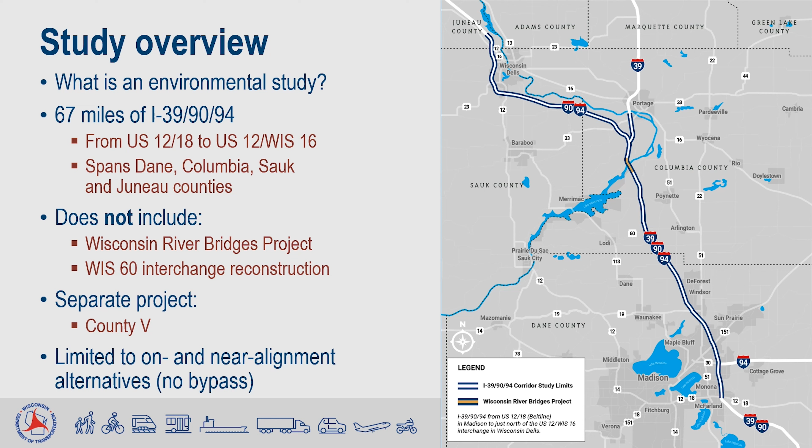Also, County V, which has been discussed previously at PIMs for this study, will now be studied and constructed as part of a separate project. This study is limited to on and near existing alignment alternatives, which I'll cover later in the presentation. I want to emphasize that bypass alternatives that had been considered with a previous study are no longer being considered.

Here you can see the study's purpose is to address existing and future traffic demands, safety issues, aging and outdated corridor infrastructure, and corridor resiliency.

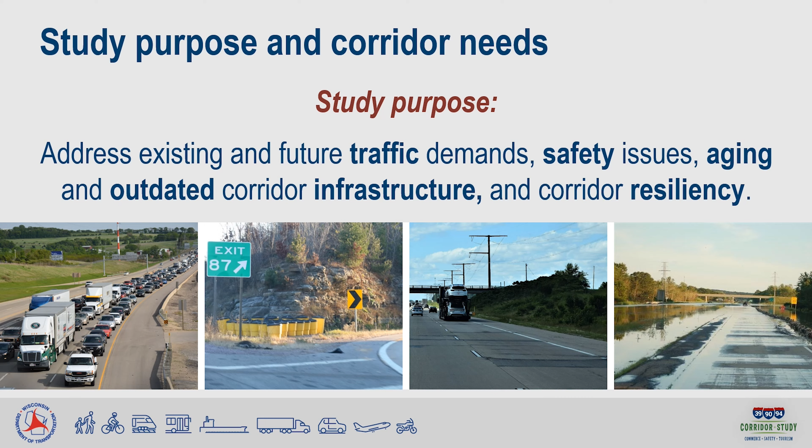The corridor needs include traffic. Traffic volumes along the corridor, especially truck traffic, are increasing. That causes vehicle congestion and backups along the interstate at times of heavy traffic, like rush hour and Friday and Sunday afternoons in the summer. Because this is an interstate corridor, much of the evaluation relates to automotive traffic. However, WisDOT is also looking at bicycle, pedestrian, and transit traffic at intersections and other crossroads.

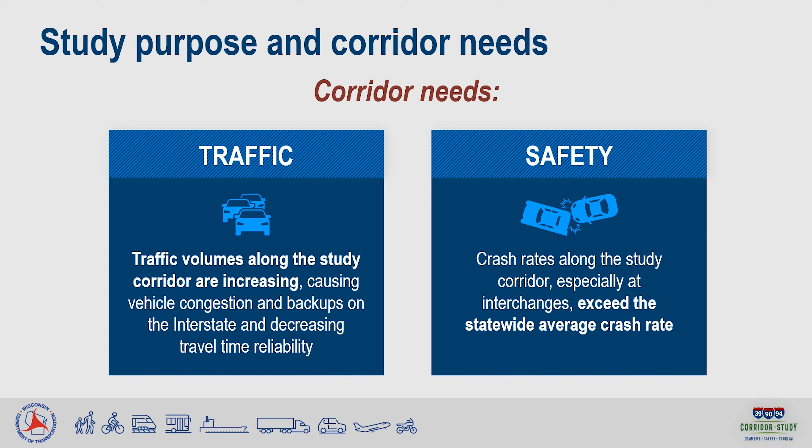Safety. Crash rates along the study corridor, especially at interchanges, exceed the statewide average crash rates. Congestion and outdated roadway designs contribute to crashes.

Pavement. Pavement along the corridor is in need of rehabilitation, maintenance, or replacement. If this study doesn't move forward as a project, it's anticipated that rehabilitation maintenance projects will be needed in 26 of the next 30 years somewhere along the study corridor. Each of those projects would require lane closures and cause traffic impacts.

Bridges. Many of the bridges along the corridor also need work. By the year 2030, 84 of the 113, or around 75%, of the structures within the study corridor will be over 50 years old, and many do not meet current design standards.

Flooding. Flooding is also a concern in areas of the corridor, as both I-39 and I-90-94 are in low areas as they cross the Baraboo and Wisconsin rivers. WisDOT also reviews environmental impacts, agency and public input, and costs when evaluating how to meet the corridor needs.

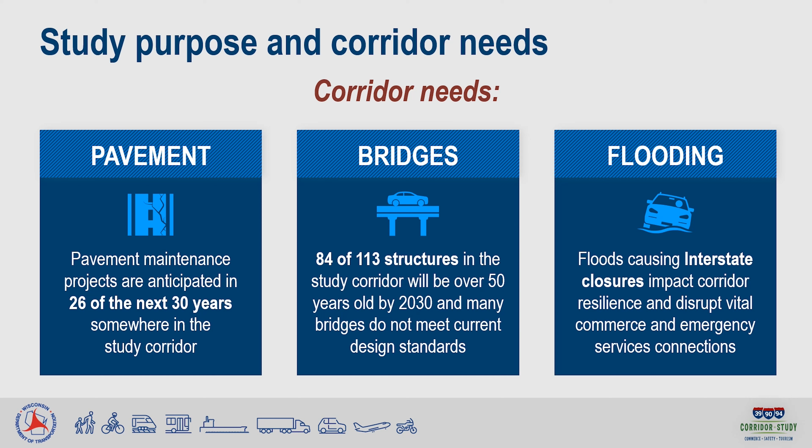Most of the remainder of this presentation will take you through the alternatives that are being carried forward for further study in the draft environmental impact statement. WisDOT is carrying alternatives forward based on how well they meet purpose and need factors, their impact to the environment, public feedback received, and cost. All alternatives considered are available to view online on the I-39-90-94 study website.

Here are the items that we would like your feedback on today. For those attending an in-person PIM, there are surveys available for you to fill out to state your preference related to intersection control, like stop signs, roundabouts, or traffic signals, and alternatives throughout the corridor. Everyone has the ability to fill out the survey online using the QR code shown here.

I'll start with the remaining alternatives on the mainline and then move to each interchange along the corridor. We have two remaining mainline alternatives. Both are what we call modernization alternatives. So what is modernization? Modernization is basically a term we use when we plan to upgrade infrastructure to meet current or modern standards whenever possible.

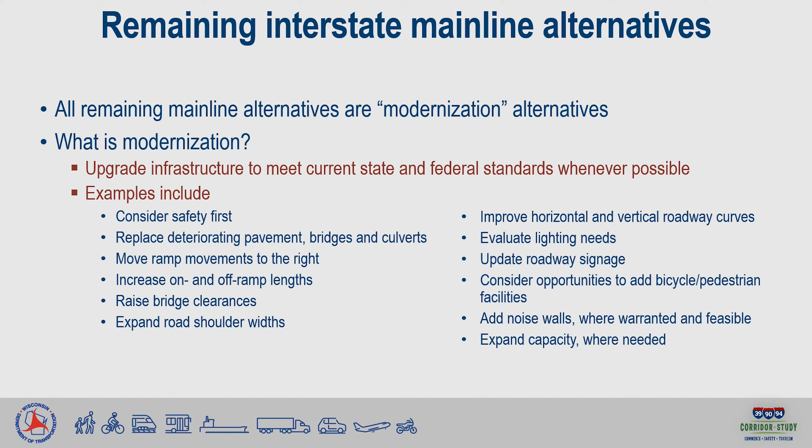Here you can see the cross-section of the two modernization alternatives moving forward for further study, and how they compare to the existing roadway footprint. These cross-sections represent what the roadway looks like in most areas.

There are some areas, particularly between the I-94 Wisconsin 30 interchange and the US 151 interchange, where both alternatives are wider than this. Both alternatives have 12-foot lanes and typically have 12-foot shoulders. The one exception is in the modernization hybrid alternative, where we have 18-foot shoulders that could be used as a managed lane.

A managed lane uses the inside shoulder to travel during peak hours or when needed. It is a dynamic operation that is monitored and only turned on when needed. This is shown above in the blue highlighted area.

The overall width of the modernization plus added general purpose lanes alternative is 12 feet wider than the modernization with managed lanes alternative. This added width is because the modernization hybrid uses the shoulder when additional capacity is needed, while the modernization plus added general purpose lanes adds a lane at all times, so no cars need to drive next to the barrier wall.

It should be noted that managed lanes are not always open when needed. It is anticipated that 25% of the days when the managed lanes are open, they could be partially or fully closed due to incidents, large snow events, power outages, or other reasons.

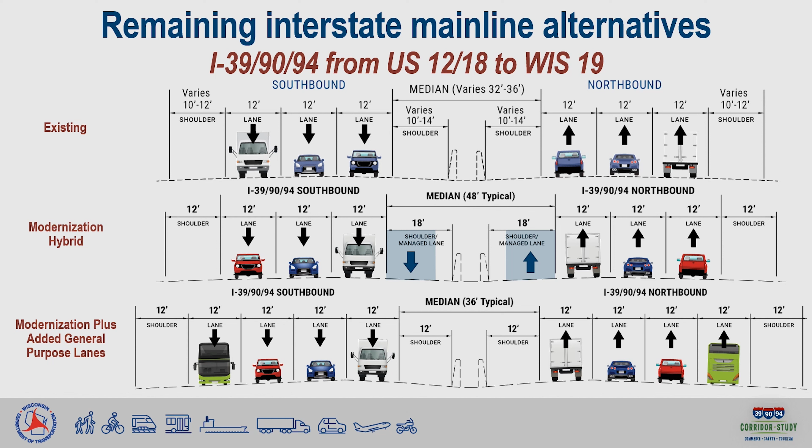The two remaining mainline alternatives are identical from Wisconsin 19 to the northern project limit, but I'd like to talk through the pros and cons of the modernization hybrid and the modernization plus added general purpose lane alternatives in the area where they differ, from US 12/18 to Wisconsin 19.

The overall width of the modernization hybrid is 12 feet less than the modernization plus added general purpose lane alternative. That doesn't mean additional right-of-way is needed along the entire corridor, but in certain areas more real estate may be needed for the modernization plus added general purpose lane alternative compared to the modernization hybrid alternative.

The additional infrastructure would result in an upfront cost for the modernization hybrid that is slightly less than the modernization plus added general purpose lane alternative. However, the modernization hybrid is more costly to maintain and operate. For that reason, the modernization hybrid becomes more costly within 8 to 15 years of preliminary construction.

Predictive safety is the biggest variance between the two alternatives. The modernization hybrid is expected to reduce total crashes by 3% and fatal and injury crashes by 1% compared to a modernization of existing lanes alternative, while the modernization plus added general purpose lane is expected to reduce total crashes by 30% and fatal injury crashes by 28%.

To help put that into context, there have been approximately 30 fatal injury crashes every year on this stretch of highway. A reduction of 28% is approximately 8 fewer accidents per year, and more people getting home to their families.

Some other items we're taking into consideration include traffic demand. For example, the modernization hybrid alternative adds a lane on the inside shoulder. However, larger traffic demands are to and from ramps along the outside of the roadway, especially from US 12/18 to I-94 Wisconsin 30. The start and end points of the modernization hybrid alternative add additional decision points. Lane drops can have higher crash rates because of traffic weaving and merging conflicts.

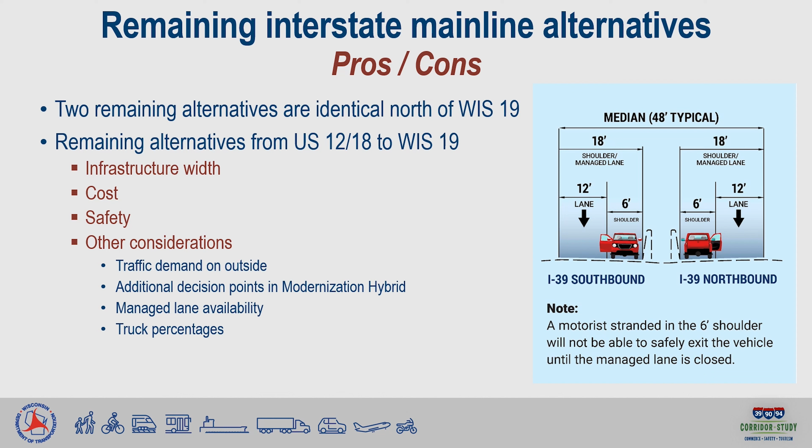For the section from the I-39 I-90/94 split to the US 12 Wisconsin 16 interchange, both the modernization plus added general purpose lane and the modernization hybrid alternative have the same proposed cross-section, which includes 12-foot inside and outside shoulders and 3 12-foot lanes. There is no managed lane proposed for this segment of roadway.

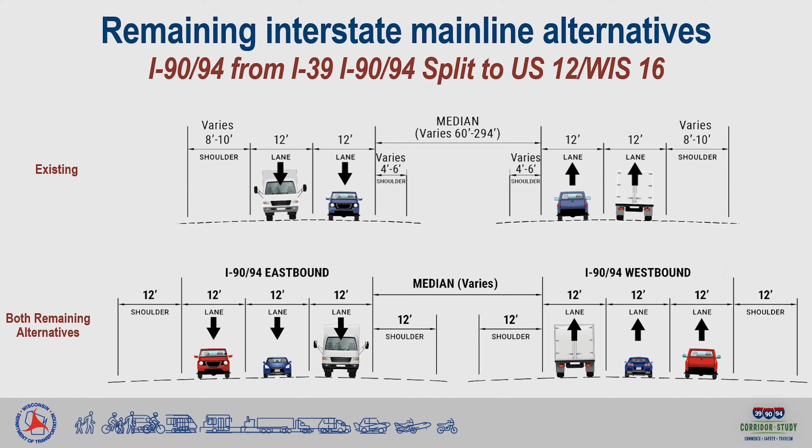Moving on now to the interchanges along the corridor. Here are the 16 existing and 2 potential new interchanges being evaluated.

Please note that I'll skip over the County V interchange and the Wisconsin 60 interchange in the presentation. County V is anticipated to be reconstructed as a separate project in the next few years, and Wisconsin 60 was recently reconstructed.

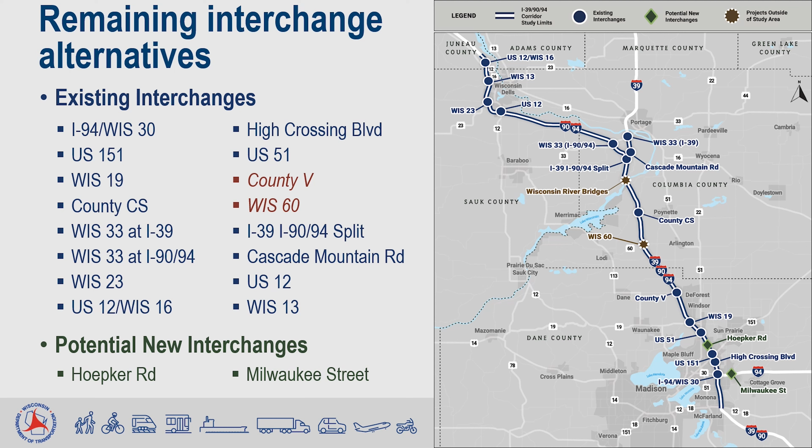Exhibits regarding these alternatives, and those that WisDOT is not moving forward with, will be available for viewing at the in-person PIMs in Madison and Wisconsin Dells, and are located on the project's website. Today I will cover these interchanges from south to north.

We will start by looking at the I-94 Wisconsin 30 interchange. Some people also refer to this as the Badger interchange. WisDOT is moving forward with the full modernization number 2 alternative at this location.

This alternative would remove all left-hand entrance and exit ramps and has simpler geometry than the full modernization number 1 alternative. Weave movements are reduced, and ramp speeds would be closer to mainline freeway speeds. There is one relocation of a municipal maintenance facility required.

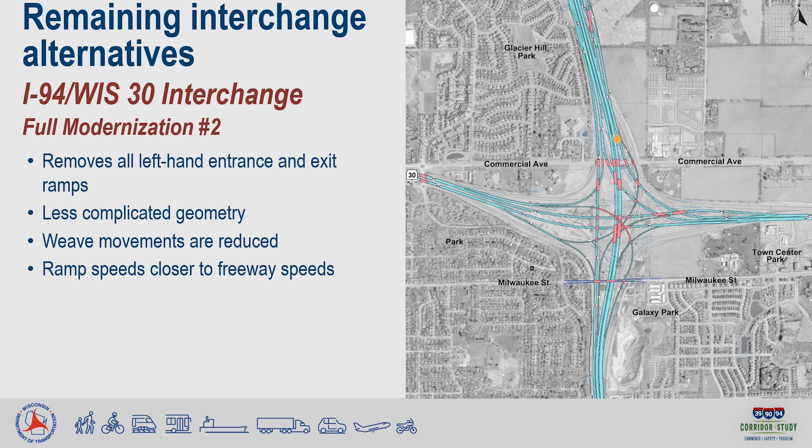This alternative shows possible pedestrian and/or bicycle accommodations along Milwaukee Street. Accommodations are intended to be installed as shown in blue, pending community agreement, final design considerations, and the ability to acquire real estate. Moving slightly east now, this is a potential new interchange at Milwaukee Street that WisDOT is investigating based on a request from the City of Madison.

We investigated a diamond interchange and a partial cloverleaf interchange at this location and are moving forward with the partial cloverleaf alternative, primarily due to the added weave length provided between this interchange and the I-39/90/94 and I-94 Wisconsin 30 interchange discussed on the previous slide. That added weave length is safer than the shorter length accommodated with a diamond alternative.

This alternative also has lower wetland impacts. Both alternatives require the relocation of an agricultural barn, shown with the orange diamond. This alternative shows possible pedestrian and/or bicycle accommodations along Milwaukee Street, intended to be installed as shown in blue, pending community agreement, final design considerations, and the ability to acquire real estate. It's important to note that this interchange is dependent upon local funding from the City of Madison.

WisDOT is performing an intersection control evaluation between roundabouts and signals at the ramp terminals and is looking for your input on the type of intersection control you prefer. See the QR code here if you'd like to fill out the survey online. There are also paper surveys available for those attending in person.

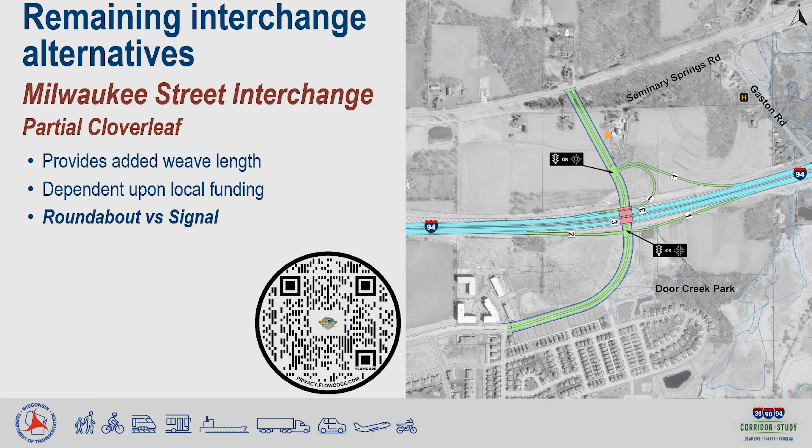At US 151, our remaining alternative is a directional interchange. The primary movements to and from the freeway portion of US 151 are free-flow ramps that will be much closer to freeway speeds than the existing cloverleaf ramps. There's also an embedded diamond that services East Washington, and a half-diamond interchange that services High Crossing Boulevard.

This alternative moves the US 151 interchange at Nelson Road/American Parkway to an extension of Eastpark Boulevard to create greater distance between that interchange and the interstate interchange. Overall, this alternative addresses travel demands better than the other alternatives and has a relatively low environmental impact compared to other alternatives.

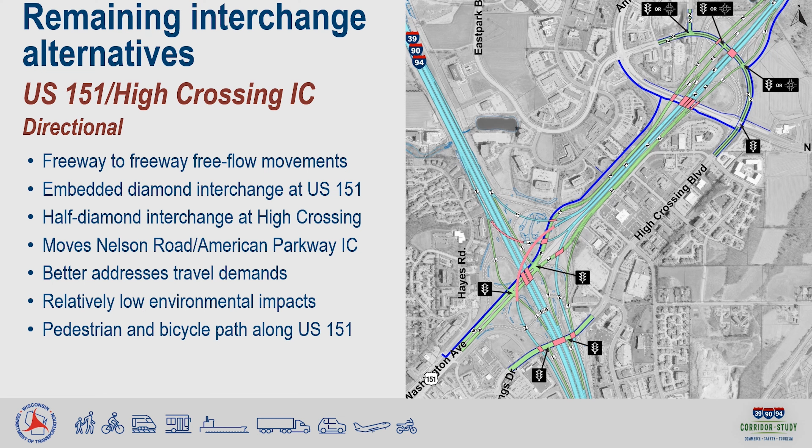This alternative shows a possible pedestrian and/or bicycle path along US 151. Accommodations are intended to be installed as shown in blue, pending community agreement, final design considerations, and the ability to acquire real estate. We'd like your input on interchange type at both the I-39/90/94 and US 151 diamond interchange, and the US 151 and Eastpark Boulevard interchange.

At I-39/90/94 and US 151, we are performing an intersection control evaluation between a standard diamond interchange with signals at the ramp terminals or a single-point urban interchange, or SPUI. The image shown here is for the standard diamond with signals, and here is an alternative with a SPUI. All traffic is controlled by a single set of traffic signals located in the center of the intersection.

A SPUI is currently in place at the US 12/US 53 interchange in Eau Claire and at the Verona Road interchange with the Beltline in Madison. More information on SPUIs can be found on WisDOT's website.

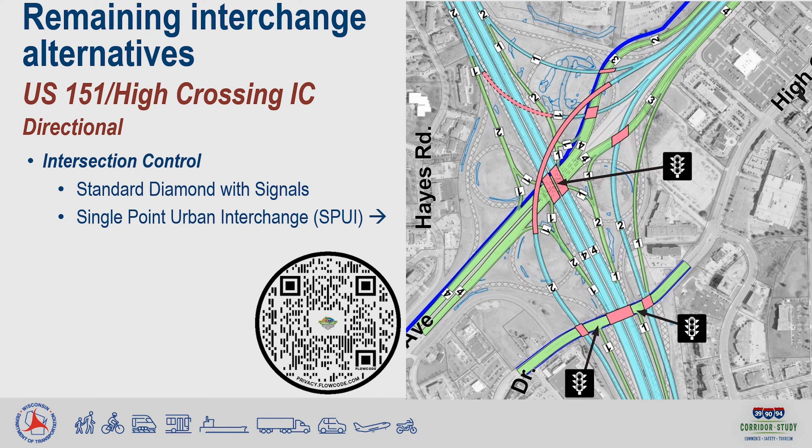Next, we'll move to the US 151 interchange with the reconfigured Nelson Road interchange, which will be moved to Eastpark Boulevard. Here, we would like your feedback on a preference between signals or roundabouts.

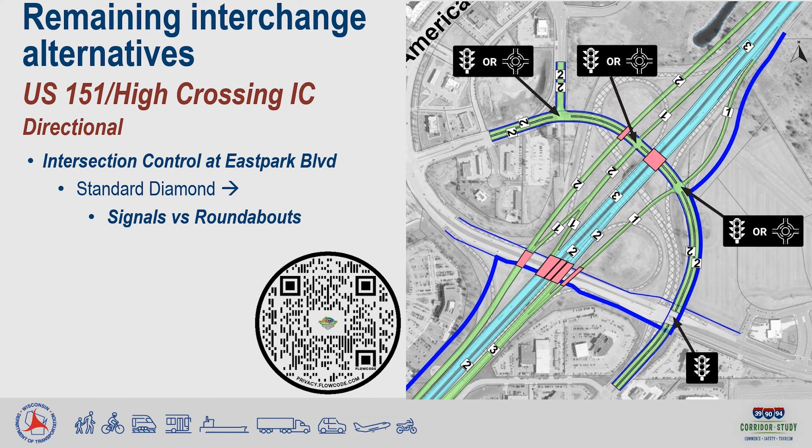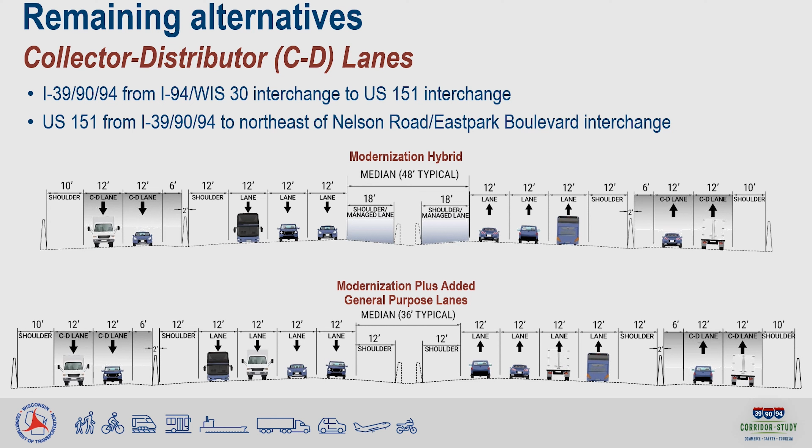Next, we'll spend a little time talking about collector-distributor, or CD lanes. We're proposing utilizing them in two locations within the corridor: on mainline I-39/90/94 from the I-94 Wisconsin 30 interchange to the US 151 interchange, and on the freeway segment of US 151 from I-39/90/94 to just northeast of the Nelson Road/Eastpark Boulevard interchange. The graphics shown here are for the I-39/90/94 segment. As you can see, collector-distributor roads run parallel to mainline traffic and are used to separate mainline traffic from merging traffic. Eventually, collector-distributor lanes merge back into the mainline traffic.

Note that if you want to exit at High Crossing Boulevard, you'd stay to the left to merge onto mainline I-39/94, and then exit to High Crossing Boulevard. This configuration makes it so that traffic traveling eastbound out of Madison that wants to access US 151 never has to enter the mainline lanes of I-39/94.

Similarly, traffic entering I-39/94 southbound from US 151 that's looking to exit at I-94 Wisconsin 30 to go east or west doesn't need to enter mainline traffic.

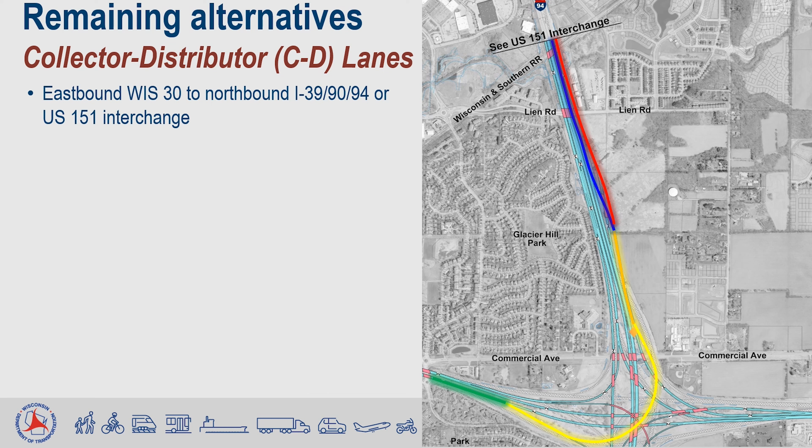Next, let's take a look at the collector-distributor lanes along US 151. I'll start by continuing from the previous example.

If you decide to stay right to exit to US 151, shown in red, you get another decision point where you could either stay to the left for mainline US 151 traveling towards Sun Prairie, shown in purple, or exit to the US 151 collector-distributor road, shown in pink, so you could access the Nelson Road Eastpark Boulevard exit, shown in yellow. If you did need to access US 151 after taking the exit to the collector-distributor roads, you could also merge back onto US 151 at this point, shown in orange.

Now let's take a look at traveling in the other direction. If you're traveling southbound on US 151, your decision point occurs northeast of the new Nelson Road Eastpark Boulevard interchange. If you're looking to continue southbound along US 151 to East Washington Avenue, you will actually exit prior to the Nelson Road Eastpark Boulevard exit, shown in yellow.

This collector-distributor road then picks up additional traffic from the Nelson Road Eastpark Boulevard interchange, seen in blue, before continuing on to the East Washington Avenue interchange with I-39/90/94. If you're looking to access I-39/90/94 or the Nelson Road Eastpark Boulevard interchange, you'd stay to the left, shown in red. The exit to Nelson Road Eastpark Boulevard is shown here in green.

All traffic looking to access I-39/90/94 would once again stay to the left and continue until a diverge point at the I-39/90/94 and US 151 interchange. Traffic looking to travel south would stay to the left, shown in purple, and all traffic looking to travel north would stay to the right, shown in orange.

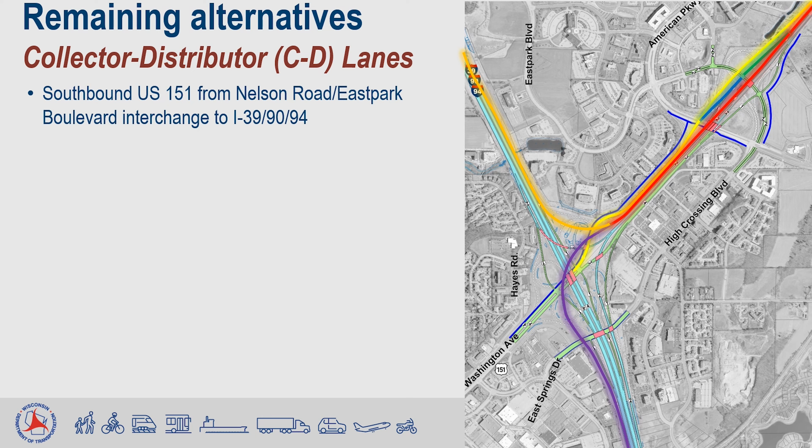Moving slightly north now, this is the potential new interchange at Hoepker Road. WisDOT is moving forward with the shifted diamond alternative. The freeway would need to be shifted to the east to allow enough room for the ramps on the west side of the freeway. This would require residential relocation on the east side of the freeway, shown with an orange diamond.

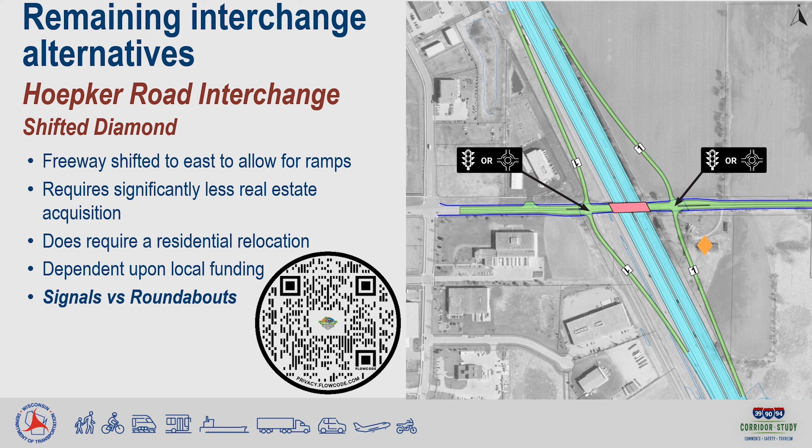This alternative requires significantly less real estate acquisition than the other alternative considered. This alternative is showing possible pedestrian and/or bicycle accommodations along Hoepker Road. Accommodations are intended to be installed as shown in blue, pending community agreement, final design considerations, and the ability to acquire real estate. Similar to the Milwaukee Street interchange, an interchange at Hoepker Road is dependent upon local funding. We'd like your feedback here on your preferred intersection control type between signals or roundabouts.

The next interchange is the US 51 interchange. We are looking at a partial cloverleaf alternative that would have a similar configuration to the existing interchange. There are some changes that will be made to improve the existing safety concerns. The on-ramps will merge together prior to merging onto the freeway. This alternative would also remove US 51 access to North American Lane and Daentl Road, which would improve safety.

This alternative better addresses the existing and future travel demands than the other alternative considered. It would also be less costly. This alternative is showing a possible pedestrian and bicycle path along the east side of US 51. Accommodations are intended to be installed as shown in blue, pending community agreement, final design considerations, and the ability to acquire real estate. Here, we are looking for your input on the intersection control for the southbound off-ramp between a stop sign or a signal.

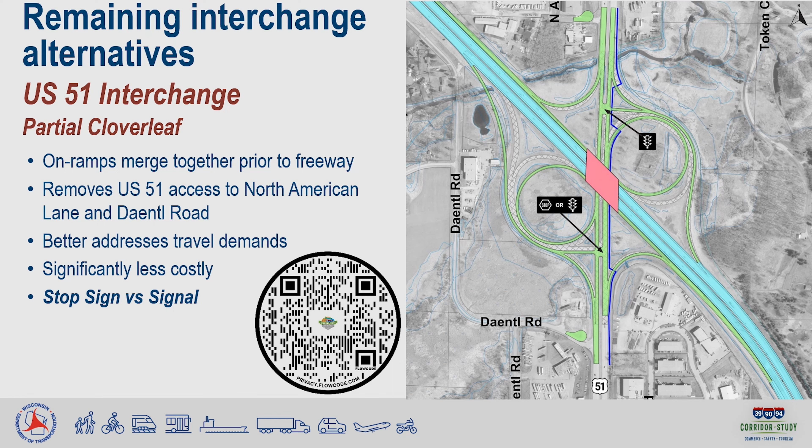We know that the northbound off-ramp requires a signal based on operations.

At the Wisconsin 19 interchange, WisDOT will be further evaluating the U-ramp alternative. This alternative consolidates intersections along Wisconsin 19 by combining the entrance location of the northbound on-ramp to the same location as the southbound on-ramp. The northbound on-ramp then loops under the interstate and goes over Wisconsin 19 before merging onto I-39/90/94. The alternative also removes a signalized intersection by realigning the northbound off-ramp to County CV.

That allows for the removal of the signals at the existing northbound off-ramp. The alternative increases capacity along Wisconsin 19 from 4 lanes to 6 lanes from Pepsi Way to Tierney Crossing. We know that signals are required along Wisconsin 19. Overall, this alternative better addresses safety compared to the other alternatives while providing the capacity needed along Wisconsin 19.

This alternative is showing a possible pedestrian and bicycle path along the north side of Wisconsin 19. Accommodations are intended to be installed as shown in blue, pending community agreement, final design considerations, and the ability to acquire the real estate.

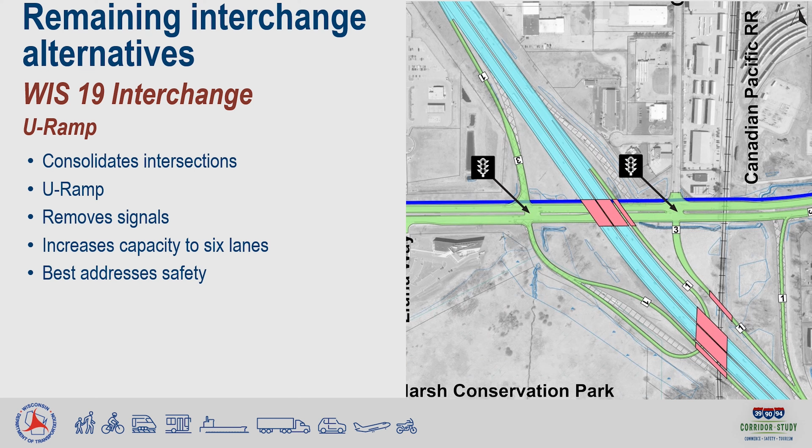Before we move to the County CS interchange, I'd like to note that we're going to skip over the County V interchange, as that interchange is now being evaluated as part of another study, along with the Wisconsin 60 interchange, which was recently reconstructed.

WisDOT will carry forward a diamond alternative at County CS. This alternative reconstructs County CS and the bridge over the interstate and provides a divided median and protected left turn lanes onto the interstate entrance ramps. Both the on and off ramp lengths are increased to better allow for speeds at or near interstate speeds at the ramp merge points.

This alternative better addresses safety and has 500 feet less stream bed relocation compared to the partial cloverleaf alternative. At this location, we would like your feedback on your preference between stop signs or roundabouts.

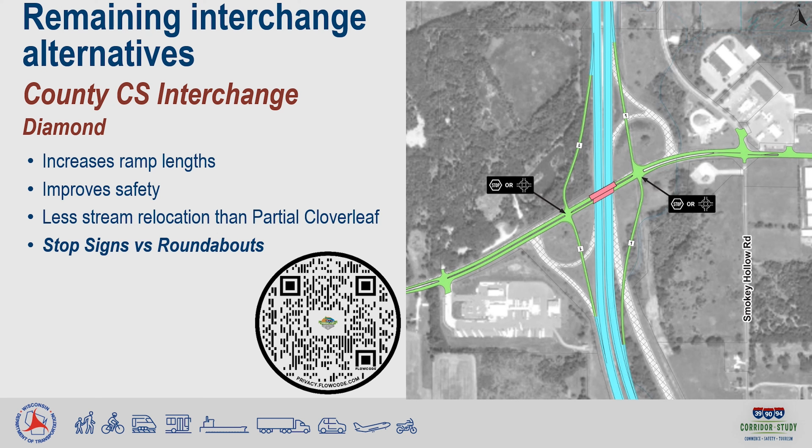At the I-39, I-90-94 split, the low build alternative will move forward for further study. This alternative will improve safety by removing the Cascade Mountain interchange, which was too close to the split interchange. Instead, access to Cascade Mountain will be available through the embedded Wisconsin 78 diamond interchange.

All system-to-system movements are right-hand ramps with speeds close to the mainline speed. This alternative is not as tall or as costly as other alternatives. There are 3 levels in this alternative.

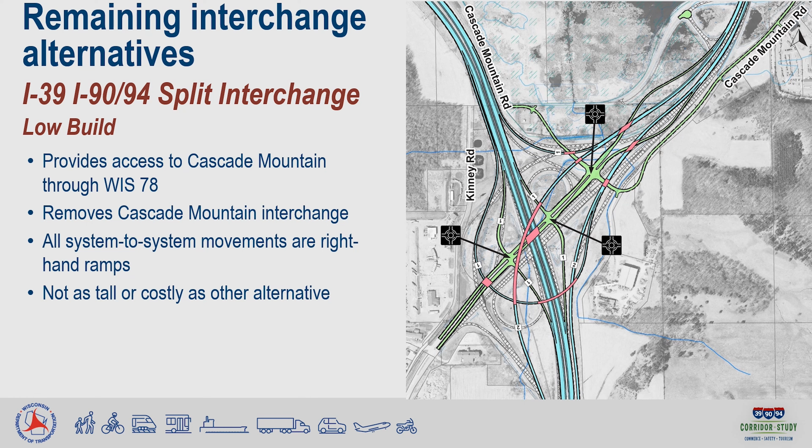I-94 is the lowest level. Then, Wisconsin 78 is the next level, followed by the flyover ramps at the top level. Roundabouts will be placed at the connections of Cascade Mountain Road and the Wisconsin 78, as well as the diamond interchange ramp terminals. At the Wisconsin 33 interchange at I-39, WisDOT will be further studying a diamond interchange.

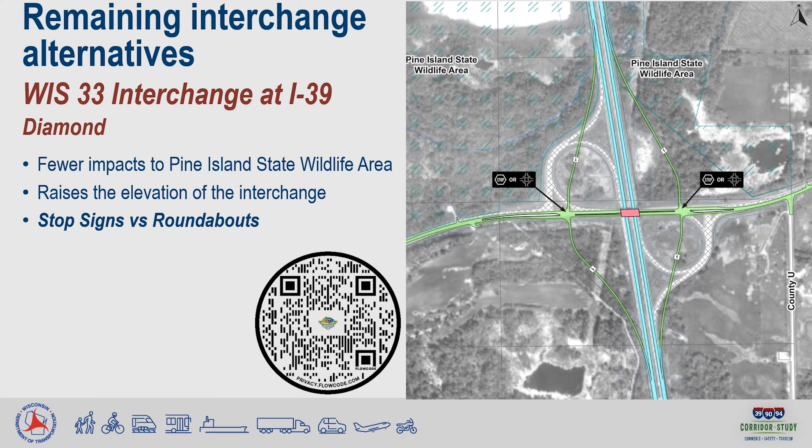This alternative requires less real estate from the Pine Island State Wildlife Area than the partial cloverleaf alternative. This alternative would add a divided median to protect Wisconsin 33 left-turning traffic onto the interstate entrance ramps. The interchange's elevation is also raised to help address flooding issues. At this location, we're looking for your input on your preference between stop signs or roundabouts.

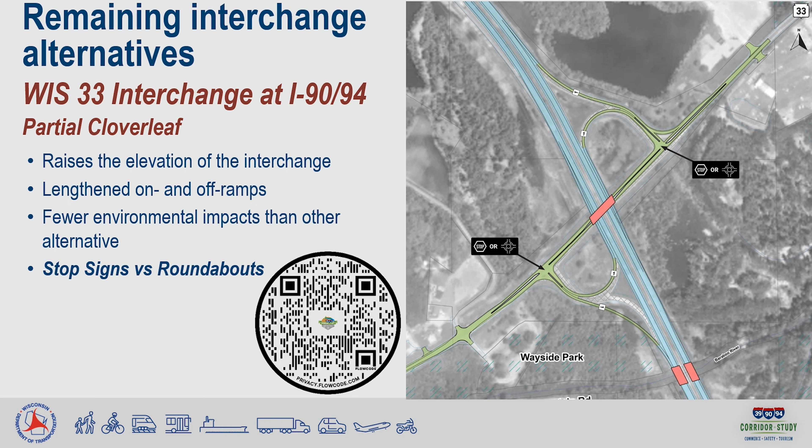At this location, we would like your input on your preference of stop signs or roundabouts.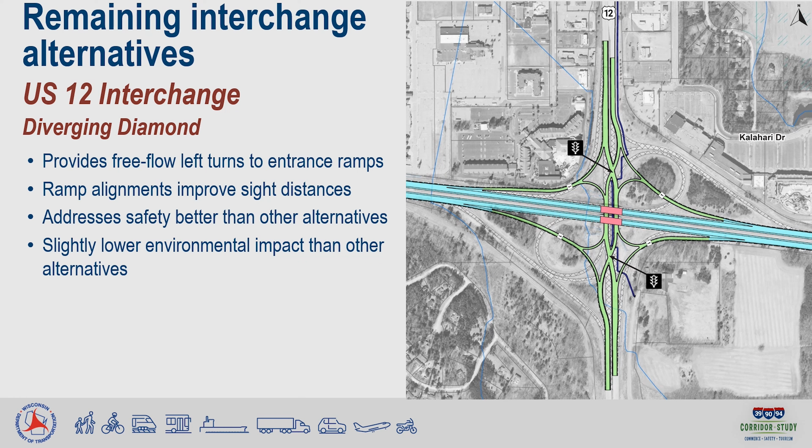Moving on now to the Wisconsin 23 interchange, where WisDOT will further evaluate a diamond interchange, which would have a similar but slightly smaller footprint than the existing interchange. WisDOT would slightly realign ramp alignments to improve sight distances for improved driver reaction time.

This alternative is showing a possible pedestrian and/or bicycle accommodations along Wisconsin 23. Accommodations are intended to be installed as shown in blue, pending community agreement, final design considerations, and the ability to acquire the real estate. This alternative has minimal environmental impacts and has adequately managed traffic demands at the lowest cost.

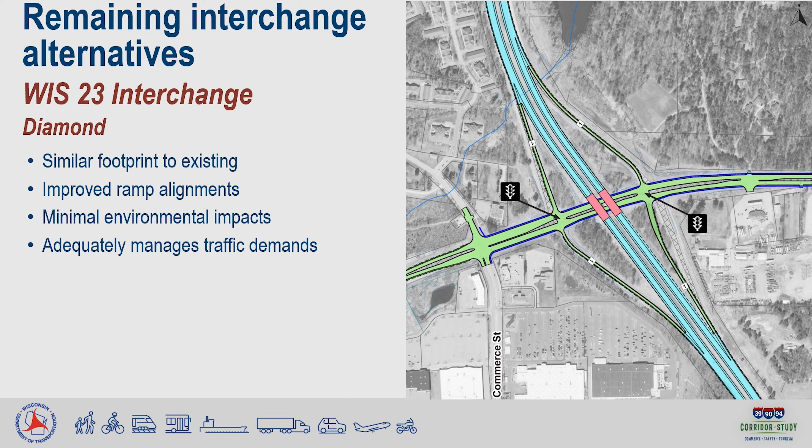At the Wisconsin 13 interchange, we are carrying 2 alternatives forward for further consideration in the environmental document. We would like your input into which alternative you prefer. We'll start with the split diamond alternative, which would directly connect County H to the interstate.

This alternative would have northbound off and southbound on ramps connect to Wisconsin 13, while the northbound on and the southbound off ramps connect to County H with one-way frontage roads on either side of the interstate. This is a similar configuration to the Wisconsin 26 Watertown Street interchange in Johnson Creek.

This alternative has more environmental impacts than the Trumpet interchange we'll discuss next. The cost is also higher for this alternative, and it relocates 3 buildings shown with an orange diamond. There is also some driveway removal at the hotel along County H.

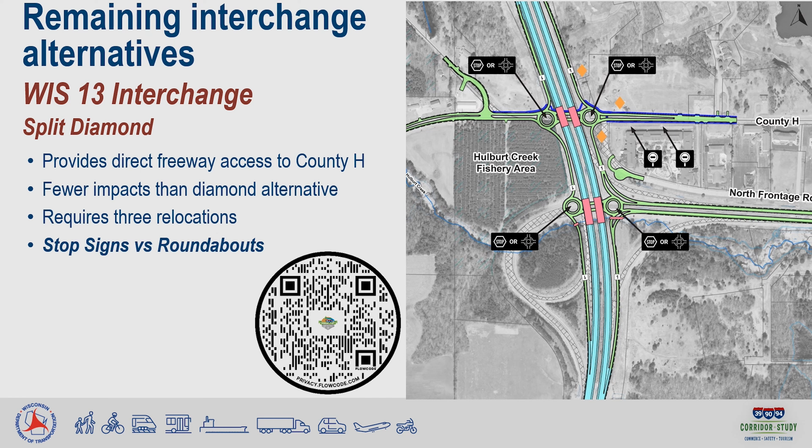This alternative is showing possible pedestrian and/or bicycle accommodations along County H. Accommodations are intended to be installed as shown in blue, pending community agreement, final design considerations, and the ability to acquire real estate. For this alternative, we'd like your feedback on your preference for stop signs or roundabouts at the 4 intersections of the interchange.

Next, we'll move to the Trumpet alternative at the Wisconsin 13 interchange. This has a similar configuration to the existing interchange, but improves ramp curvature to allow for speeds closer to interstate speeds when entering and exiting. There is also longer acceleration and deceleration lanes. There's no direct access to County H, as access remains the same as it is today.

This alternative only requires 1 relocation compared to 3 for the split diamond alternative. Less right-of-way is required, and no driveways would need to be removed. Again, we'd like your feedback on which of the 2 alternatives you prefer.

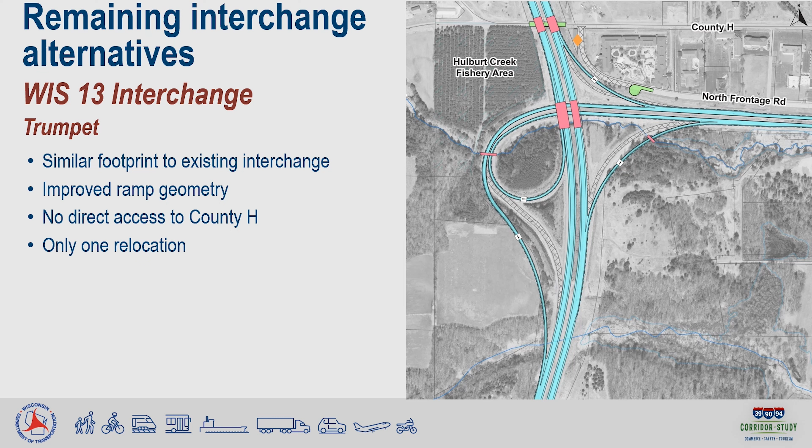Now we'll move on to our final interchange at US 12, Wisconsin 16, where WisDOT will further study the diamond alternative. This alternative reconstructs the existing interchange in a similar footprint with improved ramp design to provide better sight distance, which improves driver reaction time.

The alternative provides protected left turn lanes on the US 12, Wisconsin 16 to interstate on-ramp. It also realigns US 12, Wisconsin 16 and the 60th Street intersection to improve sight distance. This alternative has slightly fewer impacts compared to the other alternative considered, and got better public feedback, as the other alternative removed access to 60th Street.

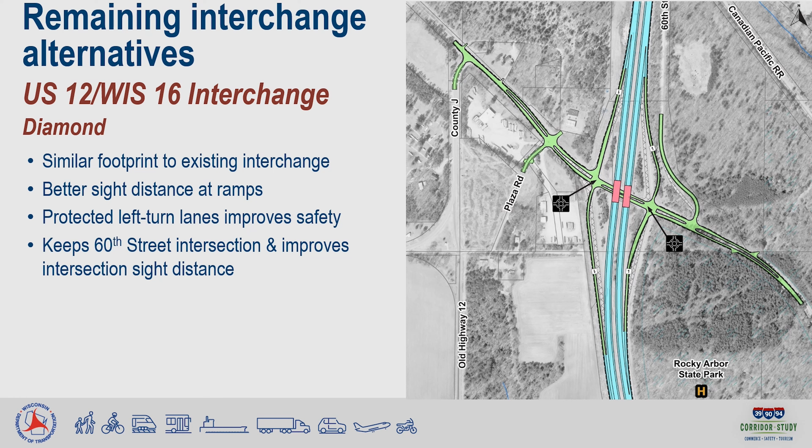Next, we will talk about the flooding scene on the corridor. The Baraboo River near the I-39, I-90-94 split flooded in 2008, closing both I-39 and I-90-94 for several days. The Baraboo River flooded again in 2018, which partially closed I-90-94. Alternate travel routes for the 2008 flooding added 66 miles of indirection and increased travel time by over an hour.

WisDOT is currently evaluating 4 scenarios that would raise the interstate elevation and add or lengthen bridges to help mitigate flooding across the interstate.

WisDOT is coordinating with multiple agencies regarding proposed mitigation measures, including the Wisconsin DNR, U.S. Fish and Wildlife, and FEMA, who all have properties adjacent to the study corridor, and the U.S. Army Corps of Engineers and the Environmental Protection Agency, who will have an opportunity to review the floodplain analysis in the draft environmental impact statement.

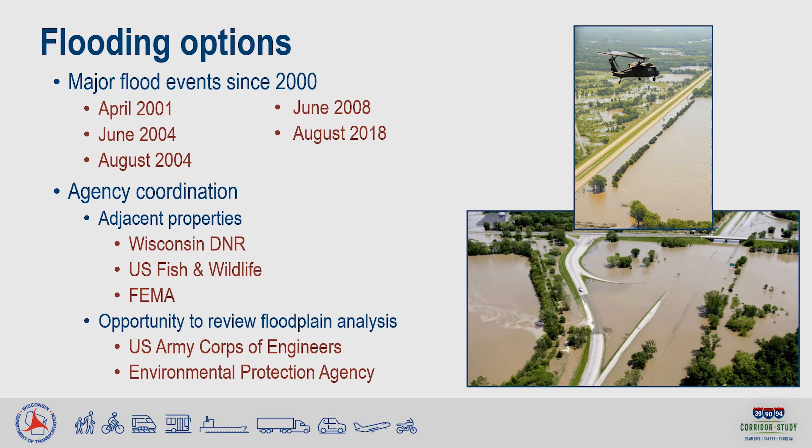Our mitigation goal for this project is to minimize and balance flood impacts to surrounding properties. We'll be performing 2 types of mitigation with the project: raising the elevation of the interstate in the area past flood events, and adding or widening bridges on I-39 to better accommodate flood events.

The next 4 slides show the 4 remaining concepts. These slides are for informational purposes. WisDOT will be working with agencies mentioned on the previous slide, local communities, and adjacent landowners to determine the appropriate alternative. Once selected, that alternative will be included in the final roadway preferred alternative.

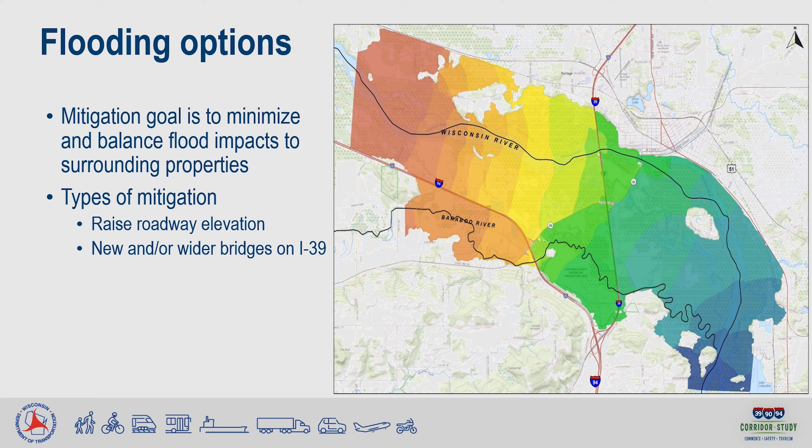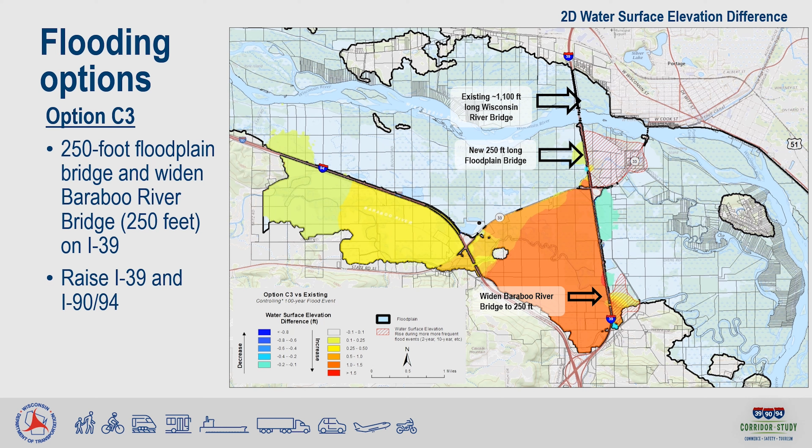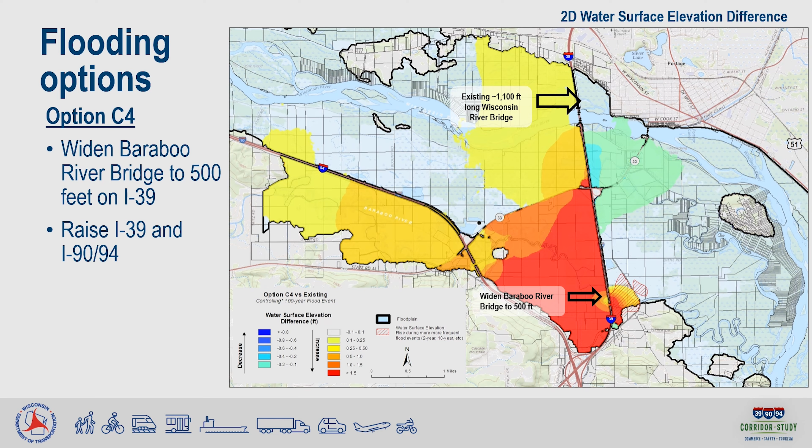I'd briefly like to touch on noise analysis. Traffic noise analysis starts with the development of a traffic noise model, or TNM. The TNM is used to measure existing sound levels, develop an existing noise model, and predict future sound levels.

Next, impacted receptors are considered for noise abatement measures. Impacted receptors are either receptors with a predicted future traffic sound level which approaches or exceeds the WisDOT noise level criteria for considering barriers for different land use categories. Noise level criteria are divided into land use categories that include residential areas, serene quiet lands, parks, schools, hotels, offices, etc., or when the predicted future traffic sound levels exceed existing levels by 15 decibels or more.

In order for abatement to be provided, it must be feasible, reasonable, and likely be incorporated. A noise barrier is considered reasonable if the total cost of the noise barrier doesn't exceed $50,000 per benefited receptor. To be considered benefited, a receptor must receive a minimum of 5 decibel noise reduction.

In addition, a minimum of one receptor or common use area must achieve the department's noise reduction design goal of 8 decibels. A noise barrier is considered feasible if a minimum of one impacted receptor or common use area achieves a 5 decibel noise reduction. In addition, abatement that is feasible must be constructible, compatible with the project's purpose and need, meet design criteria and guidance, and not result in other impacts that would offset the noise reduction benefits.

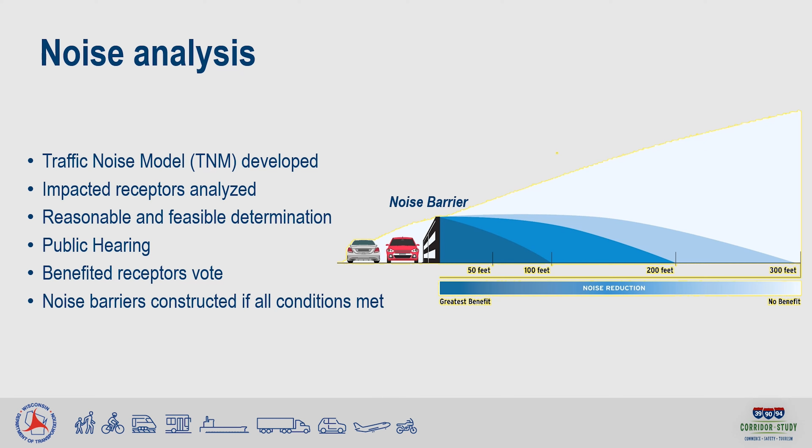Proposed noise barrier locations will be presented at the I-39/90/94 study public hearing in summer of 2024. Should a proposed noise barrier be considered reasonable and feasible, a vote will be taken of the benefited receptors. Voting would occur after the study and during final design. A barrier must receive a vote of support from a simple majority of all votes cast by the benefited receptors to be constructed. Before we wrap up this presentation, we will review the study schedule and next steps.

We held our first public involvement meeting in September of 2022 and our second in April of 2023. After PIM number 2, the Federal Highway Administration published a Notice of Intent in the Federal Register. The Notice of Intent formally announced FHWA's intention to prepare an environmental impact statement. The notice was the formal start of a 30-day public comment period where additional formal comments were provided on any aspect of the study, including the purpose and need, the range of alternatives, or impacts WisDOT and FHWA should consider in the environmental impact statement.

This information can be found on the study's environmental information webpage. In addition to the public scoping process, we'll take feedback from the 3 PIMs into account in the draft environmental impact statement. A public hearing is scheduled to take place in summer of 2024. Testimony from the public hearing will be taken into account when developing the final EIS and record of decision, which will be complete by winter of 2024.

Final design and construction are not yet funded for this project. Should the Transportation Projects Commission recommend enumeration of this project after the final EIS and record of decision, a final design and construction schedule would be developed at that time.